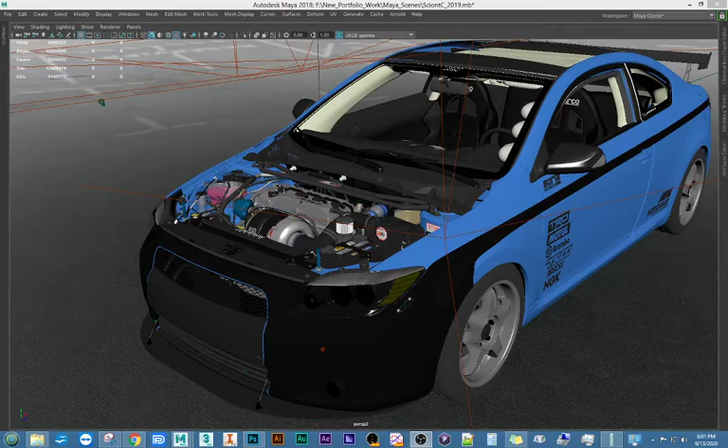Okay, really quickly, I'm going to talk about engine bay configuration as far as your vacuum lines and other miscellaneous things to help you guys get set up for tuning and just to make sure that the car is perfectly operational with as little problems as possible. Now, let me just zoom in here a little bit.

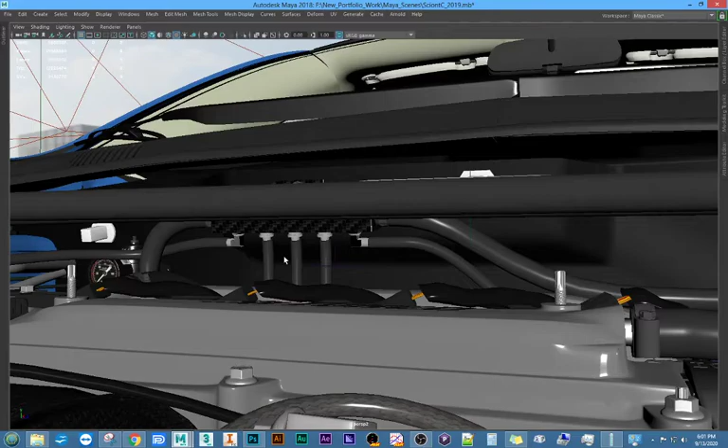First, I'm going to start with explaining the vacuum distribution block here. You want to get some sort of vacuum distribution that's easy so you don't have T-fittings all over the place, and it'll just have your engine bay being a lot neater looking. Typically it's tapped off of the brake booster. You can see the brake booster would be like here.

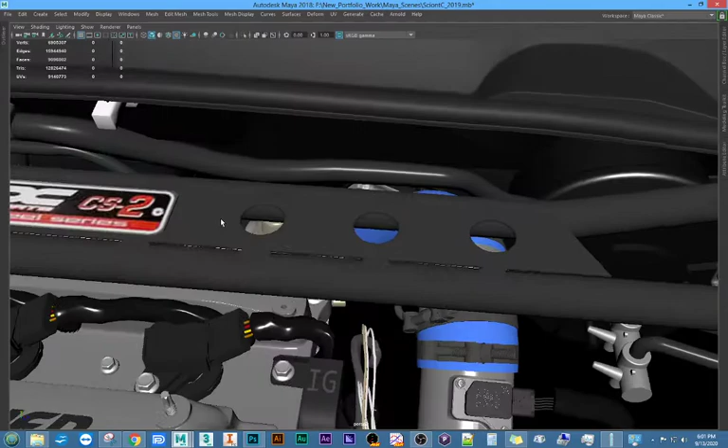This isn't an exact representation of the appearance of what your brake booster would look like, but it is the same location. There's generally a hose that comes off your brake booster and it hits a metal pipe that's against the firewall. You want to detach that hose and extend it to wherever you want to mount your vacuum block. And then, of course, the other side of that pipe would go down into the intake manifold somewhere down there that you can't even see.

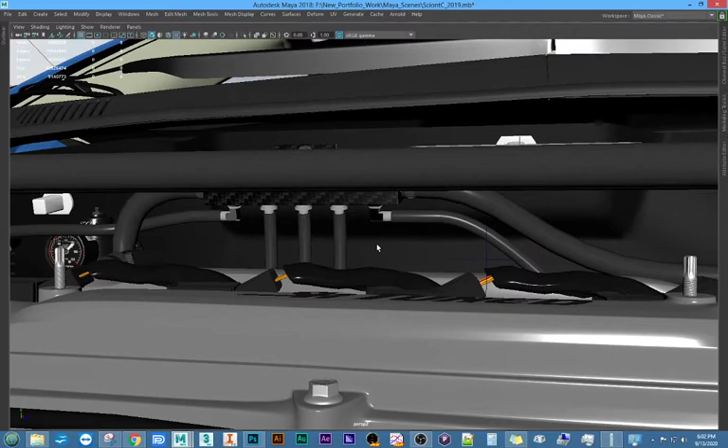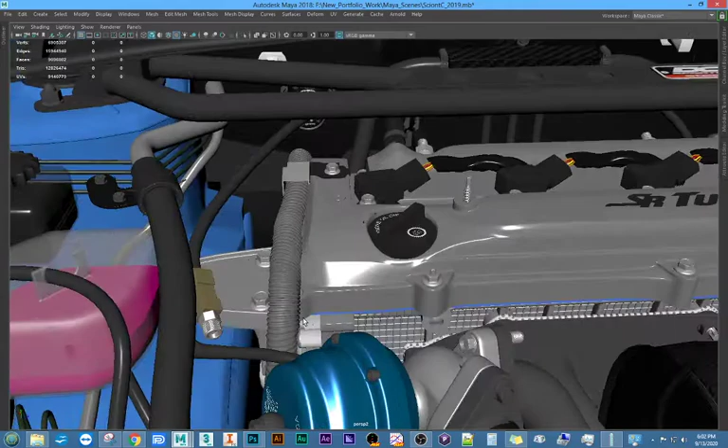Well, basically, you run all of your accessories, you know, boost gauge, adjustable fuel pressure regulator, wastegate, blow-off valve, etc. off of that. So based on this particular design I got here, I have a manual boost controller running to the wastegate. This line, you can assume would be for the FIC or whatever engine management you're using for boost reference. This one would be for the blow-off valve, which I got tucked down into here.

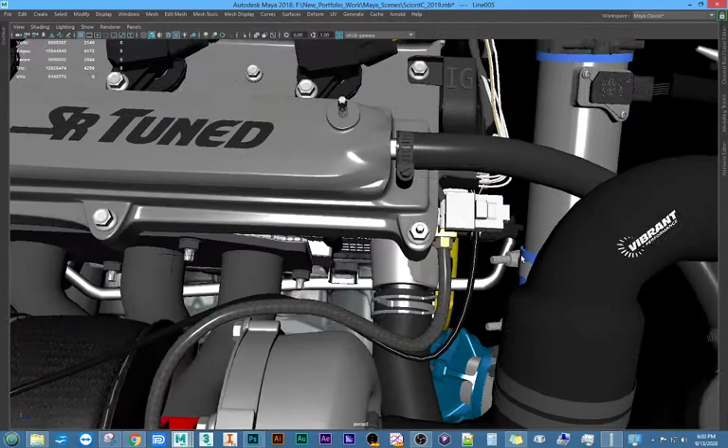And mind you, if you got a blow-through setup, you want to have it a minimum of 6 inches away from the MAP sensor, so you don't have the car thinking that it has a vacuum leak, and then you have a poor idle and things like that. I recommend Tial being the best blow-off valve to go with. It doesn't typically leak.

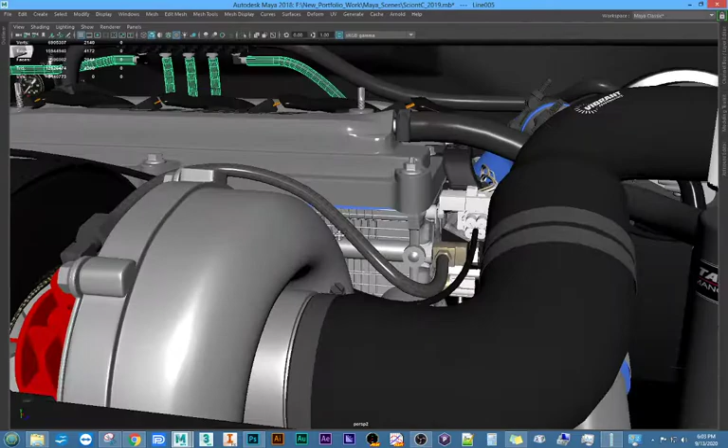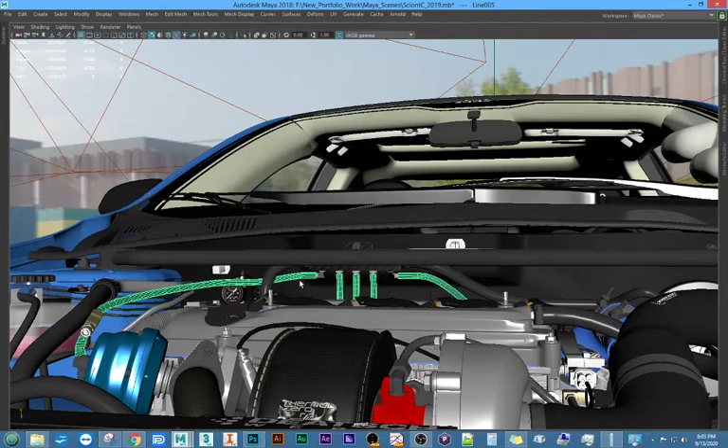Let's see what else. So yeah, a couple other lines here, like for the boost gauge, like I was saying, which would be in the car, and I have an adjustable fuel pressure regulator that also needs a vacuum source. So yeah, you can see how that's nice and localized to where you don't have a whole bunch of T fittings all over the place. So that's it for the vacuum setup.

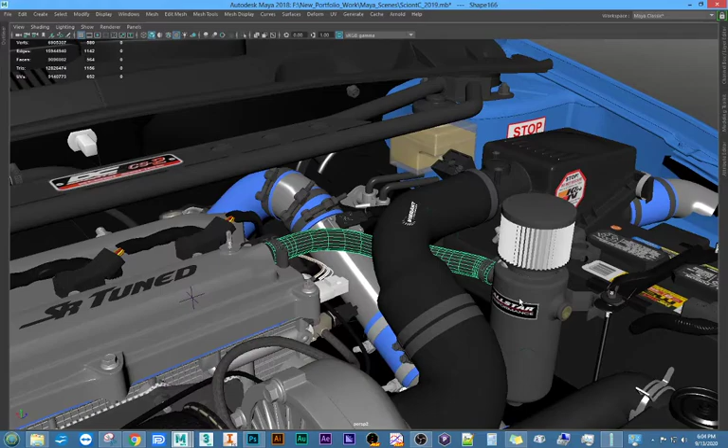Typically, this hose would go into your intake pipe, but best practices for a turbo car would say use a catch can vented to atmosphere. That way you can evacuate as much crankcase pressure as possible. And as you can see here, I got a stock air box to where it's capped off there, so the mass airflow sensor is on the charge pipe.

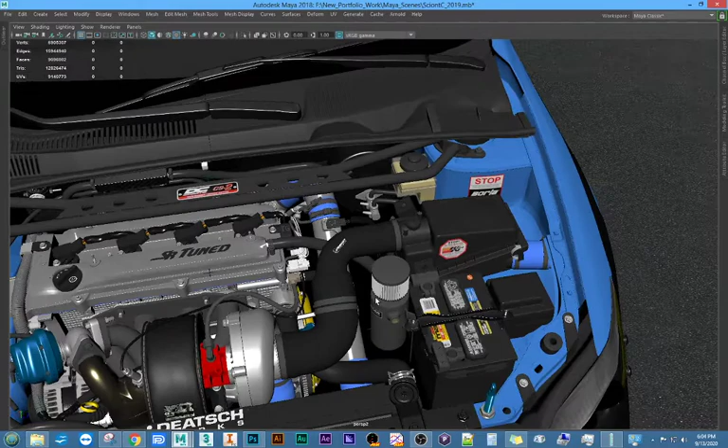Just my personal preference, using the stock air box makes it so your intake air temperatures are as consistent as possible, and you're not sucking in all this warm air from the engine bay. And definitely make use of a turbo blanket. This particular setup I had was more or less like a cold air intake when I actually had this car. So I had piping that literally came down into the fender from the box behind the fog light.

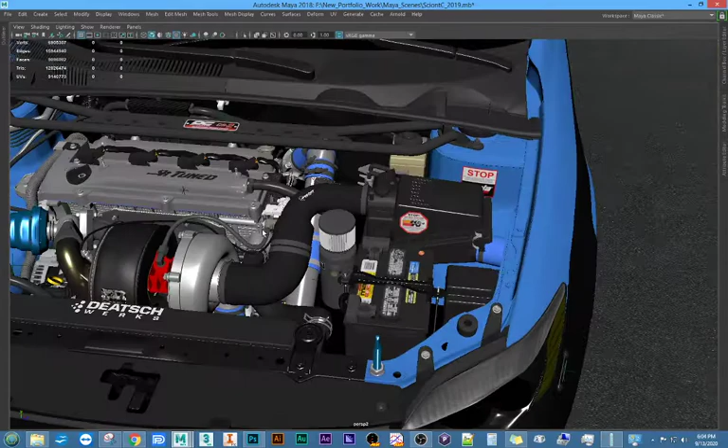Alright, so that explains that there. Switch gears. Now we're going to get a closer look at the motor itself.

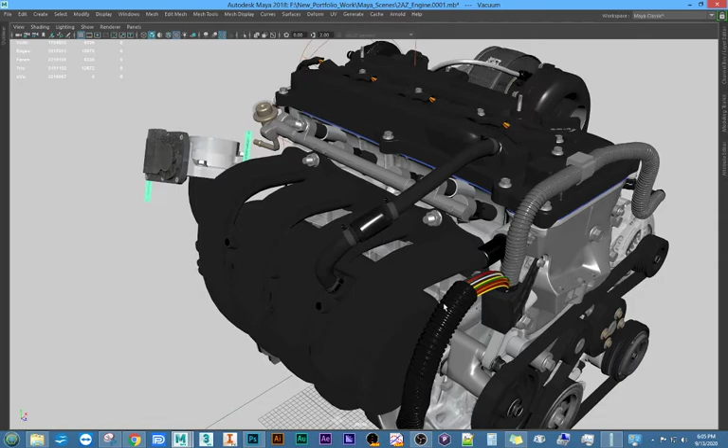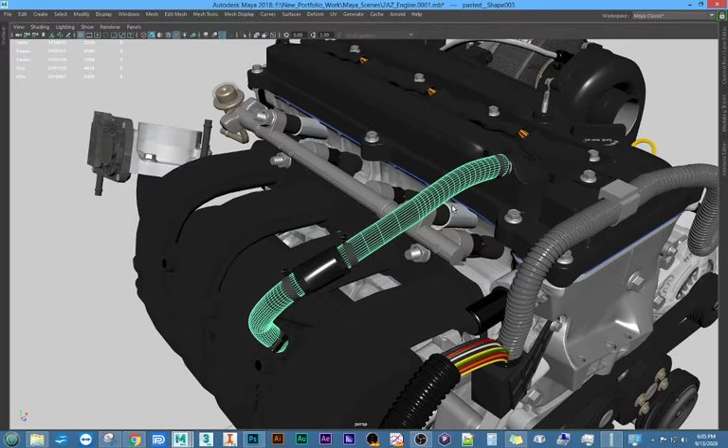Behind the intake manifold, you got the PCV line going into the intake manifold. I recommend using a racing check valve because that will block boost pressure from hitting up against the PCV, which is right there. Now the reason why you want to prevent actual boost pressure hitting the PCV is because it's not designed to handle boost. This is a normally aspirated motor, and eventually that PCV will wear out and boost pressure will get past it and pressurize the head, thus resulting in increased crankcase pressure, and you can wear your motor out prematurely.

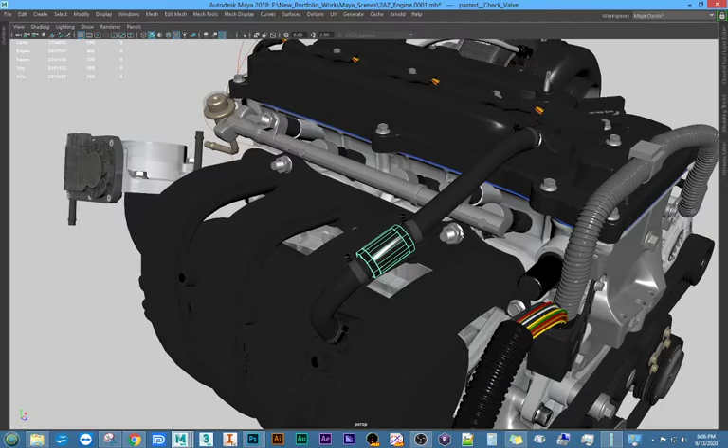So if you don't want to use this, what you can do is just change your PCV every single oil change, and you can do a better job as far as not pressurizing your head over time.

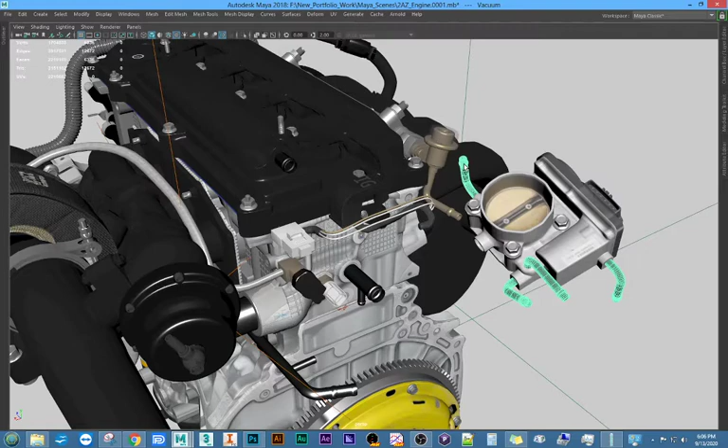Right here would be the vacuum line that comes off the throttle body. Sometimes people make the mistake of tapping off of that. You don't want to do that. You want to leave that vacuum line alone because it's meant to evacuate fuel vapors from the tank. So basically, fuel vapors come in through there and just get burnt in the intake system or through the combustion process. So you leave this vacuum line alone. Don't tap anything off of that.

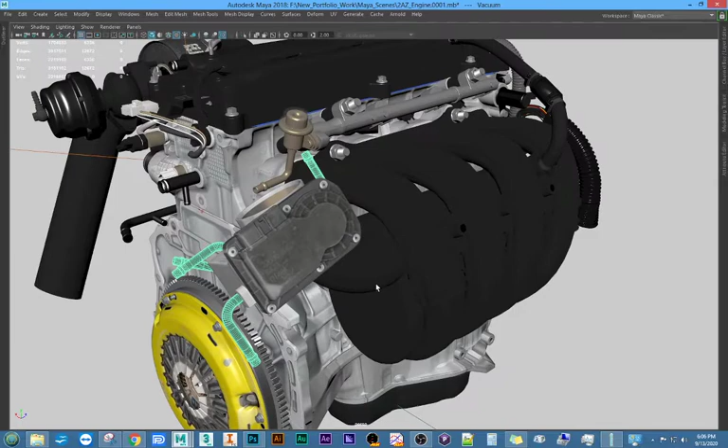This port has a vacuum line just either going into the intake manifold or out to atmosphere, depending on what your vehicle is. The main purpose for this port basically is to keep the electronics cool inside of this throttle body. That's really it. These two ports right here, they are coolant passages. So basically you have one port that would go here and another port that would go here. And then these larger ports go to your heater core, in case you're wondering.

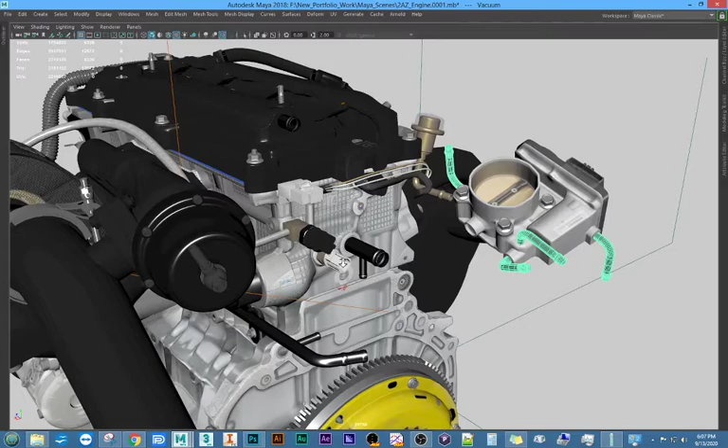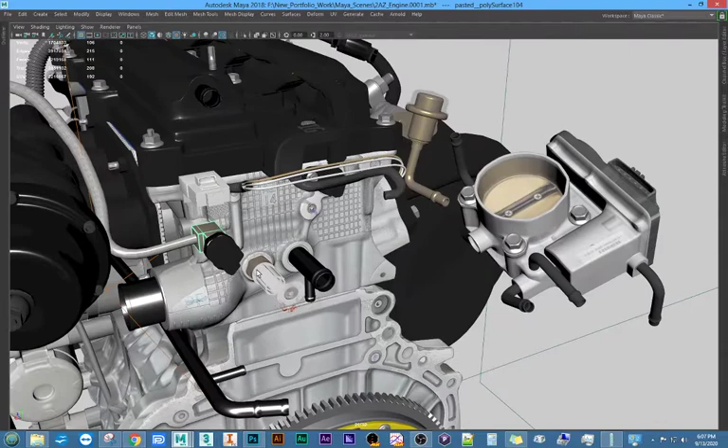Now let's talk about sensors. Typically, right here would be the factory oil pressure sensor. Typically, you would have a fitting here that you would tap off of to add another pressure sensor in case you have an oil pressure gauge, which is definitely recommended. This right here is your water temperature sensor.

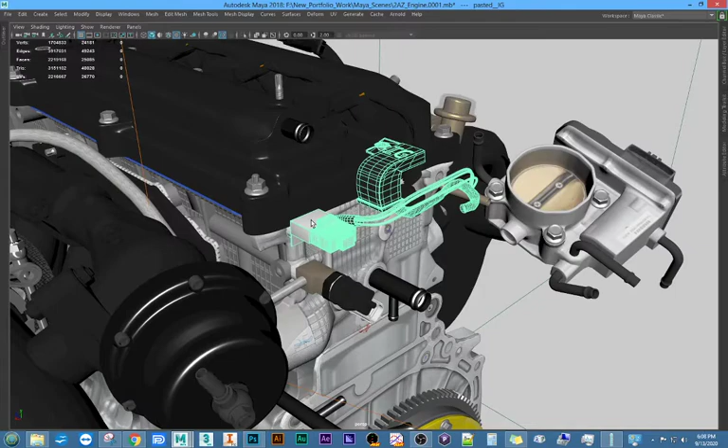This little box right here is a mystery to everybody. It's actually a noise cancellator, and that's necessary because the way this engine was designed in this particular vehicle, along with the Camry, it generates a lot of electromagnetic interference that can ultimately cause misfires without it or prevent the car from running. So if you're doing any major engine work, don't forget to put this box back on the side of the head and plug it in.

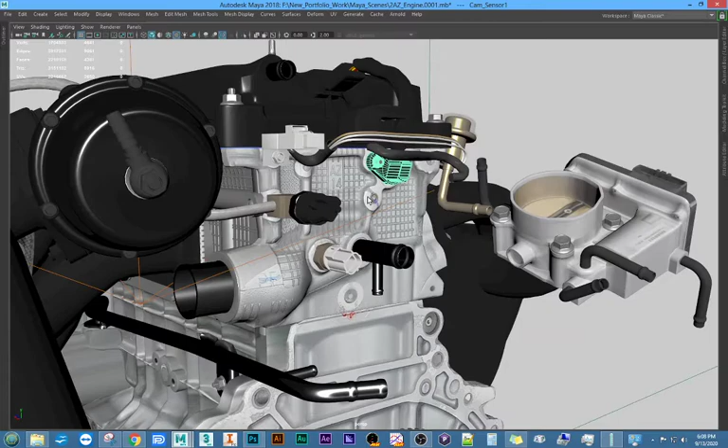Over here is your cam position sensor. It's really easy to get to, so if you ever have a legitimate cam position code, just change out that sensor. You can get it from AutoZone most of the time, lifetime warranty, 40 bucks.

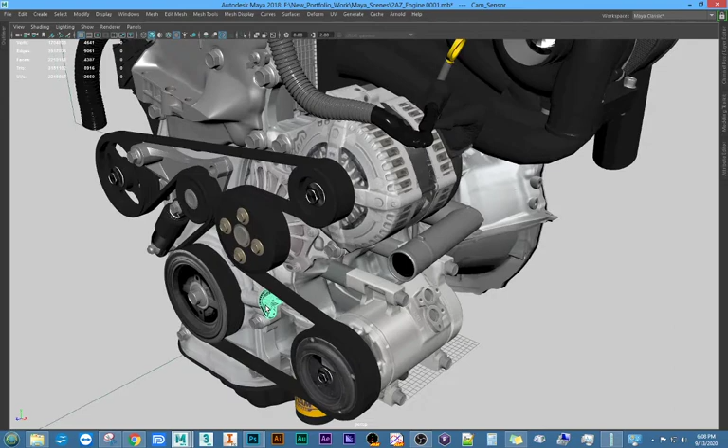Now on this side of the motor, this is where your crank position sensor is. Same deal. If you ever have a legitimate P0335, all you got to do is just change that out. Now what can trigger this code for this type of sensor is if you misshift and over rev really hard, sometimes that'll happen. But that's the location of where it's at.

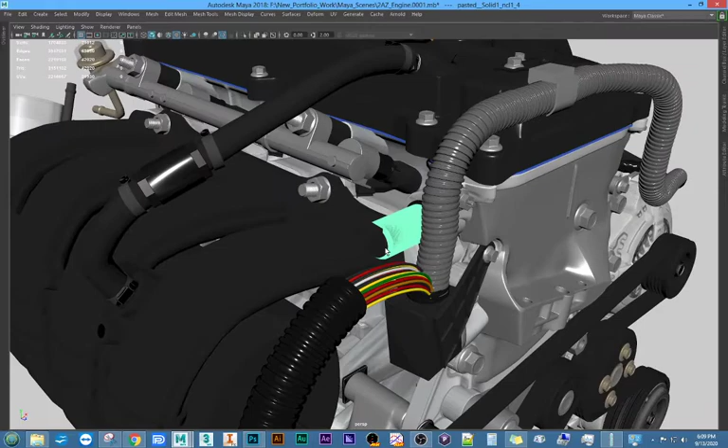Back here is your VVTi solenoid. Be careful not to break that if you're ever removing your engine. It's easy to break. And down under here, well, behind this mess right here. Oh man, I didn't put it in here. I don't think I did.

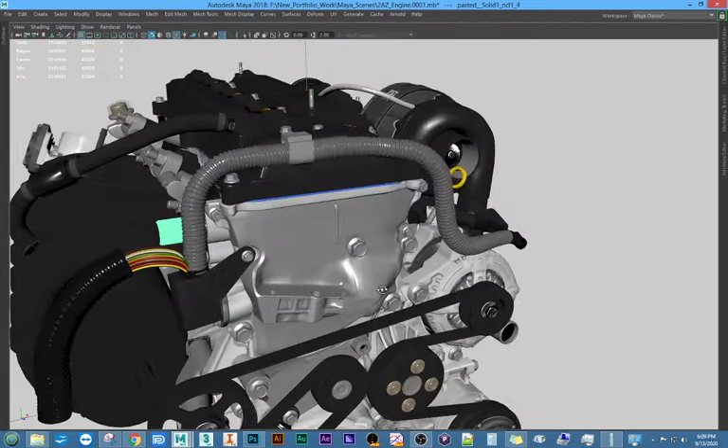Well, somewhere around here is the VVTi filter. It's hard to get to in the TC, but if you ever need to clean it, it's really easy to clean. It's got a metal screen in it. There's no real reason to have to buy a brand new one. And I think that's about it for now.